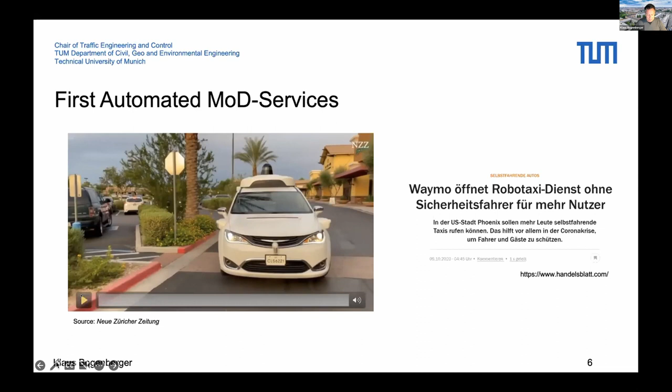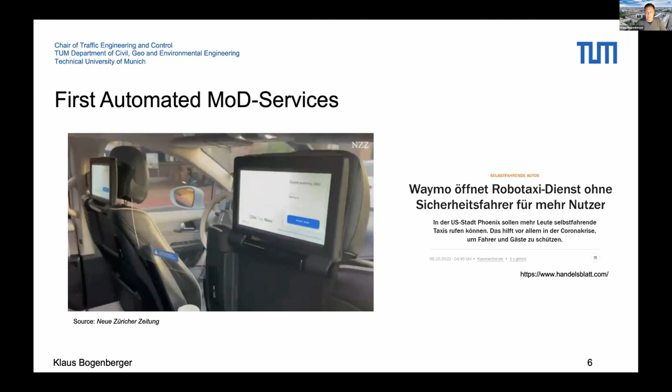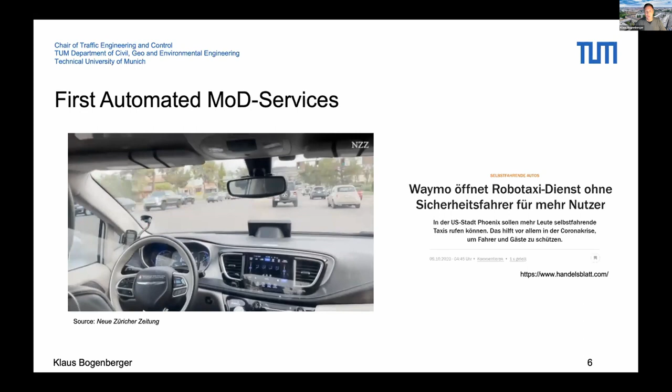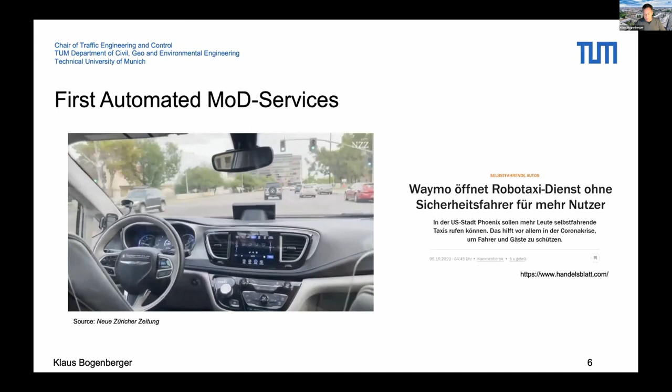So lots of people talk about automation. There are first automated vehicles available and first automated mobility on demand services - a very famous one in Phoenix, Arizona. Here's a little video - this is a so-called robo shuttle service, from a famous Swiss newspaper, and the journalist made a trip and tested the system. It worked very well. On YouTube you can find lots of videos with problems as well of such robo shuttles at the moment. But if people ask you when vehicles will drive automatically, you can tell them it already started - you can go on YouTube and find the first videos, and really see it. Actually, I've never tried it myself by now.

Also in Germany, we're going to see such a service soon. Sixt, a very famous car rental company, together with the company Mobileye from Israel, will launch a service in 2023. Of course, the fleet size will be very small, and we are very interested in seeing how it works and how people accept such a service. I have to say this will not be fully autonomous at the beginning, but the idea in a later stage of the project is also to be autonomous.

Also, Volkswagen, in brackets MOIA, are testing autonomous driving for their MOIA service. I just recently saw a vehicle like this in Munich driving around, so they are already testing their automated bus on real streets. We also expect in the near future that MOIA will test autonomous robo shuttles in their Hamburg service.

So now you know what I'm talking about. There are a couple of questions in the chat. Okay, that's not from here.

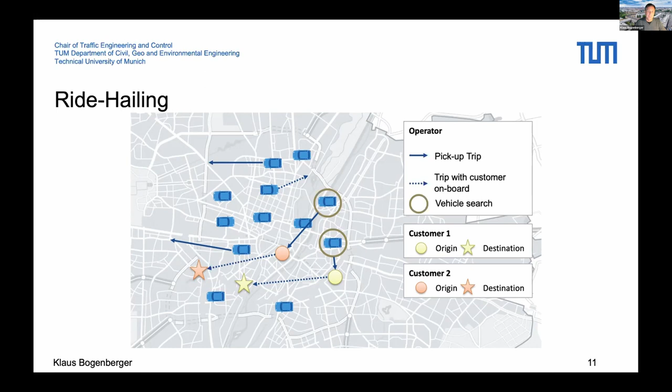In difference, ride pooling: same two customers, same origins, same destinations. In this case, the idea is to combine the two trips. So at first, there would be a vehicle driving to customer 1, then customer 2 is boarding, and then both are driven to their destinations.

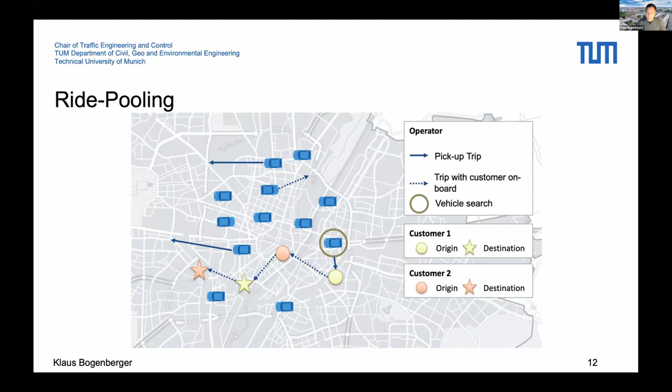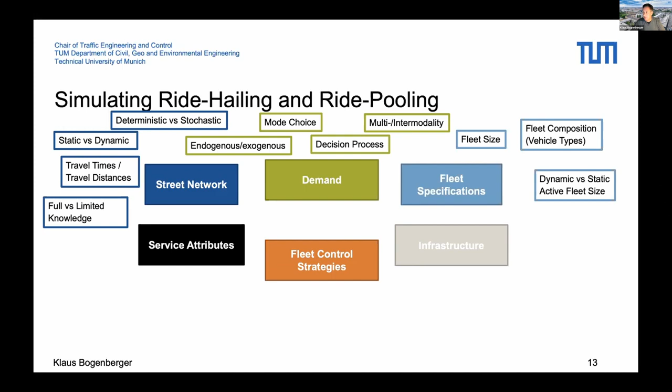Then you have to think about the fleet that you are looking at. What is the fleet size? What is the fleet composition - all electric, mixed engines? How many seats do you have, different number of seats? And are you having a dynamic or a static fleet? Is the fleet size always the same, or is it changing? And what's the number of active vehicles at the moment?

Then your service has a certain infrastructure. Are you having depots, or are you using on-street parking and on-street charging, for example? What is the boarding location you are using - are you using bus stops, or is it a door-to-door service? And what's the operating area?

Then there are several service attributes as well that you have to define. So you need to have a pricing strategy - the pricing strategy affects the mode choice, probably. If you have a high price, people are not willing to use your mode. What are walking distances and time constraints, for example detour times - people might only accept certain detour times as well. And then, of course, several fleet control strategies - routing plays a very, very important role, charging, rebalancing, and many things like this.

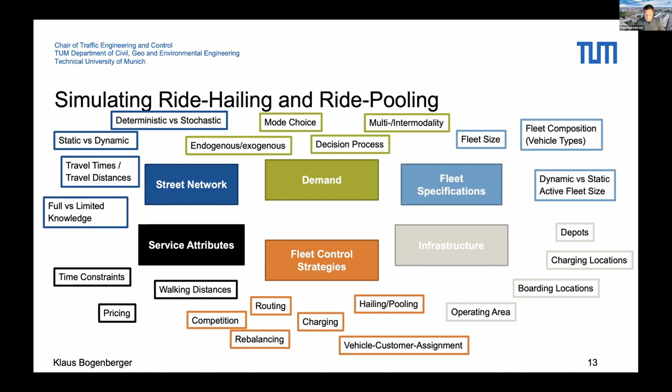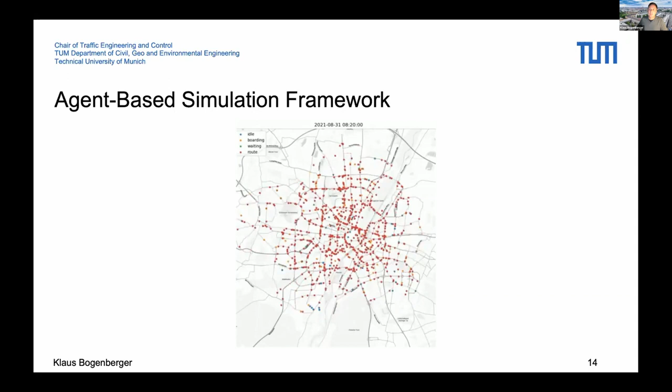We developed an agent-based simulation framework with which we are mainly working. Here's a little animation about that, and a short announcement or advertisement.

So we used this framework at the beginning to optimize hailing services. And the question was, how do you control such a hailing service? Remember, this is the situation where we just pick up one person and drive this person to his or her destination. The first question is, what customer vehicle assignment strategy are you using? Which vehicle are you really sending to the person?

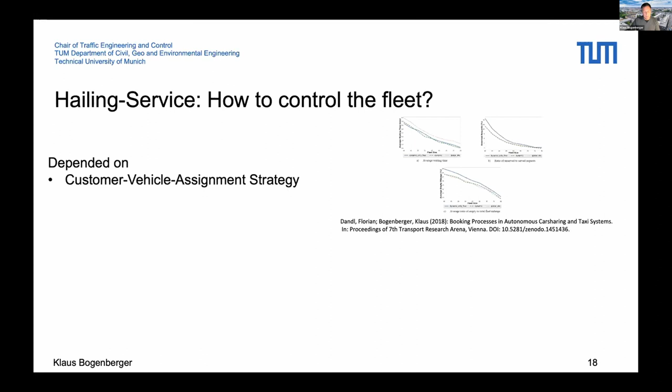Of course, there are several different options available. We tested several different algorithms, and all the different algorithms are available in the FleetPy environment.

The second question we tried to answer was, how dependent is your service on the quality of the demand forecast and the vehicle repositioning strategy? It's very important to estimate the correct demand, because the demand more or less also affects the repositioning strategy. Repositioning means that in advance, even without a request, you are already sending vehicles to certain locations in your network because you anticipate a future demand in this area. The more precise you have this demand, the better you can position the vehicles, the shorter the waiting times are for the customers, and the better the overall service.

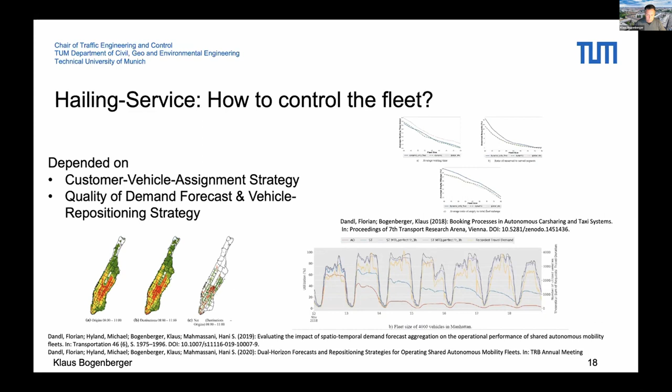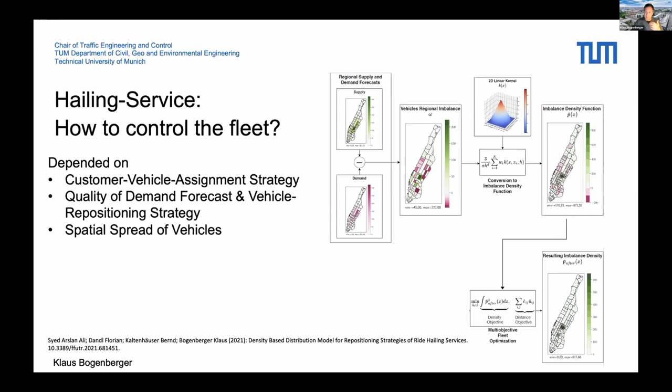Therefore, for the repositioning strategy, we developed a specific rebalancing or imbalance density function. The question is whether your system is imbalanced, which means you do not have enough vehicles in a certain area of the network where you expect high demand. This was already used in similar approaches in free-floating car-sharing systems. Here we advanced the method a little bit with a specific density estimation method to estimate the precise future demand and then forecast the imbalance. And if you have an imbalance, then you can proactively send vehicles to the areas with vehicle shortage.

Very interesting is a comparison of free-floating car sharing and autonomous hailing. We had a data set from DriveNow for Munich, and DriveNow was operating in Munich with approximately 600 car sharing vehicles. So we had this demand, the number of trips that were operated by this free-floating car sharing service provider. And then we tried to figure out how many vehicles you would need if this demand should be served by an autonomous hailing service.

You can see a function here. These are different strategies with different waiting times and detour times and things like this. And the dashed line here at 150 shows more or less the best value of the objective function. So the answer is you roughly need about 150 robo-hailing vehicles to serve the demand that was served by a free-floating car sharing service. This is 25% of the vehicles.

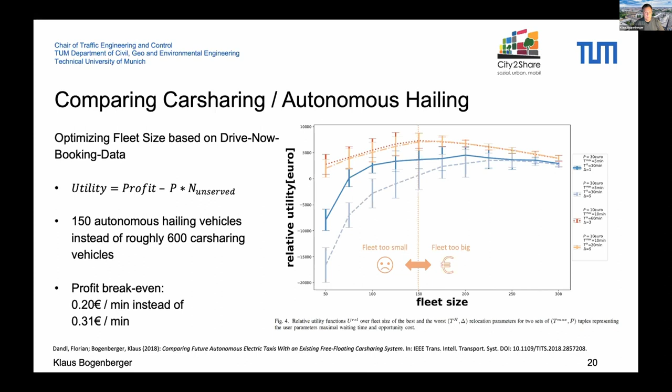Now to pooling. So this was hailing, now to pooling, and there's a very important factor in pooling called scaling. At the beginning, we developed an analytical model based on the so-called shareability. Analytical means, in this case, we didn't use at the beginning the simulation framework. We used a more or less geometric model, displayed here on the upper right. And based on this shareability, there's a shareability index with several parameters, system or service parameters and city parameters.

Therefore, you need the average velocity that can be driven in a city, so a very global value. You need to define the operating area. You need to have an idea about the pooling demand. You can derive that from the individual vehicle trips, for example. You need to think about the detour time, the maximum waiting time, and the boarding time in your service. These are all parameters you need.

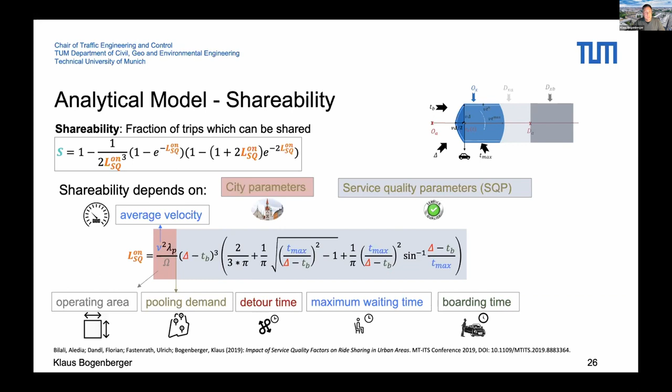So this model is very helpful when you think about implementing a ride pooling service in a city, because you don't need any simulation at first. These are very global parameters, usually very easy to get. And then you can try to figure out how the shareability in this city looks like.

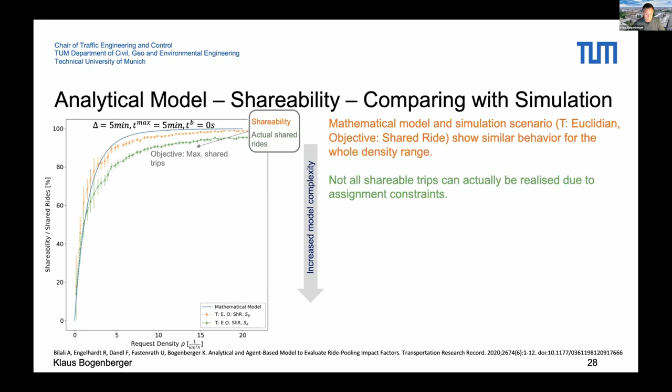Of course, not all shareable trips can actually be realized due to assignment constraints. So there are certain objectives that you need to consider. Then it further decreases - you have to be aware of that - by up to 50% when changing the optimization objective.

From just putting them all in the vehicle to save distances or minimizing vehicle kilometers traveled. So at the beginning, you just try to get them all into the vehicle. Now you try to minimize the driven distance of your vehicles, or you try to minimize the vehicle kilometers traveled.

Then when you change to a real street network, you also need to think about that this further decreased the shareability. And now we are in a realistic range, almost realistic, because when you apply temporal and spatial inhomogeneous travel times, which a real network has, then the shareable rides further decrease. So from the theoretically optimum at the beginning, you need to be aware that the real shareable rides decrease significantly. We tried to estimate percentages for this degrading.

It's possible, but I would say it depends. We didn't really do enough networks to have stable results of these parameters.

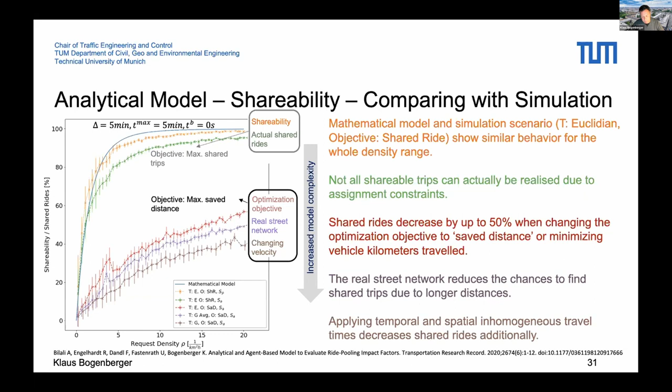When you simulate pooling services, so no analytical anymore, then you're gonna see what is really, really important when you implement a ride pooling service. On the x-axis, and this is a study for Munich, Germany, you see the simulated demand, so from 1 to 15% of the individual trips in Munich.

We have about 2 million individual trips a day in Munich. Therefore, you need a specific fleet size. So for the 1% demand, you need about 200 vehicles, while for the 15%, you need about 3,000 vehicles.

And when you then look at the relative save distance, you see that up to a degree of 5%, you're gonna have negative relative save distance, which means by implementing such a service, you induce further vehicle miles or vehicle kilometers. So the vehicles drive more than before because of empty trips to the customer, pickup trips, and the pooling effect is not that high.

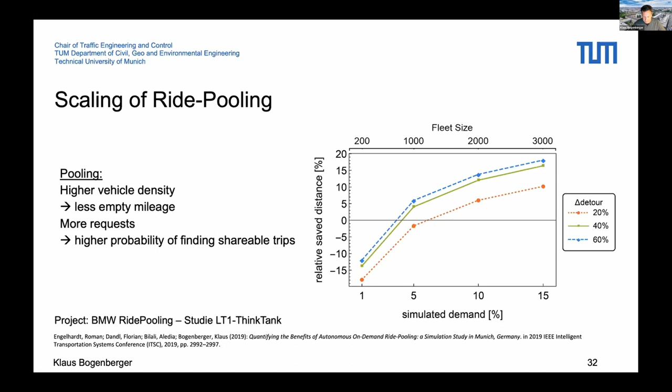This can also be illustrated in the 15% scenario, where you almost save 20% relative distance. You see in green a reduction of flow, more or less, on all major roads in Munich. You still see some red - these are minor roads where people need to be picked up.

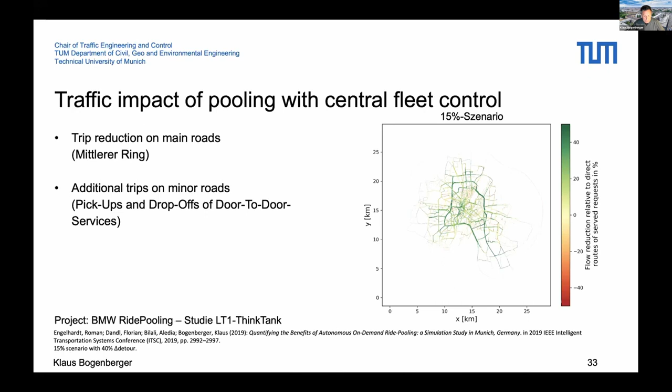But compare this to the case of the 1% scenario, where we have induced further vehicle miles. You're going to see red. So lots of roads in Munich would get more traffic, more or less, more vehicles.

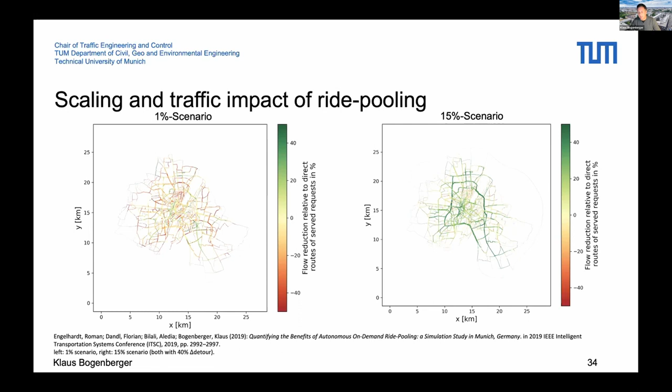So almost all requests that you get can be served in a reservation-based system. This is fairly easy, especially in this case, because this was a scenario with reservation only. But also relocation improves the situation drastically in comparison to the just basic on-demand service that I was talking about before. And another thing is that also in lower demand scenarios, you already get a mileage benefit.

You're already going to save distance. In the case of a reservation system, even with a very low demand with the 1% scenario, you end up at 0, so no more trips. And from this on, you're going to save lots of distance.

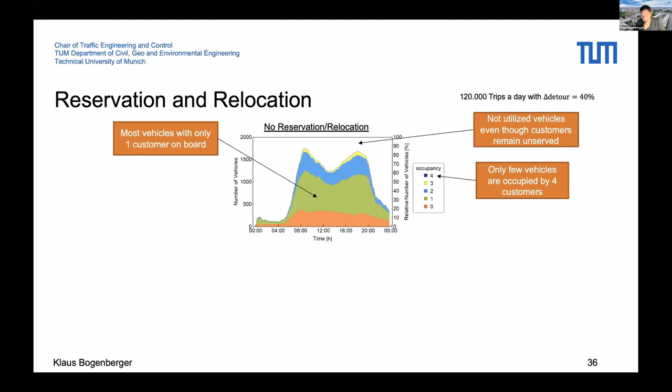But in this case, 4 was the maximum number of passengers. If you implement relocation, you add empty vehicle trips, because you try to anticipate the demand, and then you send vehicles to the areas of expected higher demand. And in this case, you're going to see the following.

During the peak, the fleet is almost fully utilized. You get much more people in the vehicles, especially the 2 and the 3 a little bit, and it drastically improves the situation in the reservation scenario, where you can now also clearly see that at the morning and evening peak, we see occupancies of up to 4 passengers.

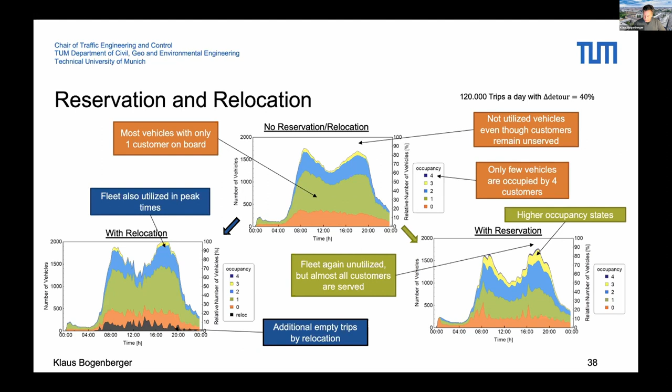I mentioned before that this was a fully reservation-based simulation scenario. For the upcoming TRB, we have a paper accepted where we did a simulation of a mixed operation. So here, some of the people are allowed to, or are reserving their trips, while others are fully on demand. The problem is that this creates a really large vehicle routing problem.

What we do, more or less, is solve the problem for the pre-booked reserved trips, and implement that later in the on-demand cases, or in the on-demand time horizons, and integrate this solution. The suggested algorithm that we developed works fairly well, and we got pretty good results.

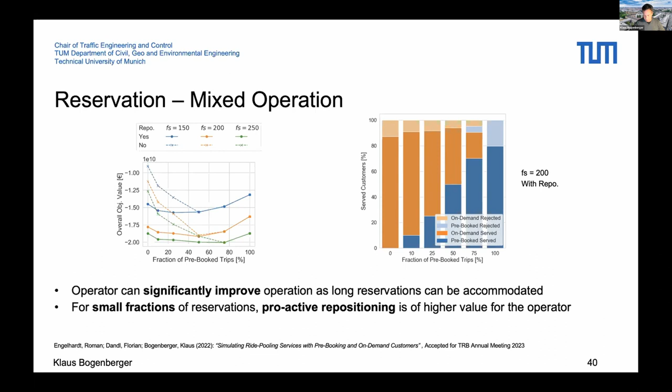Otherwise, the service quality is really bad, because a customer is pre-booking since he wants to be sure he can make his trip. I think I'm jumping a little bit now to a further slide here. We have been calibrating the simulation with real data.

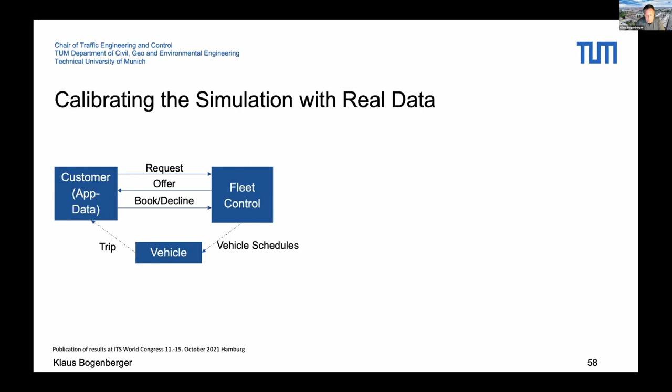As I said before, we were very happy because together with our colleagues from the Karlsruhe Institute of Technology, we were the scientific partners at the beginning of the MOIA service, and we got lots of data from them, from app requests and so on. We did a big survey to estimate the demand, especially the colleagues from KIT did that. And we could compare our simulation results with the real service. There were about 400 vehicles operated at that time in Hamburg.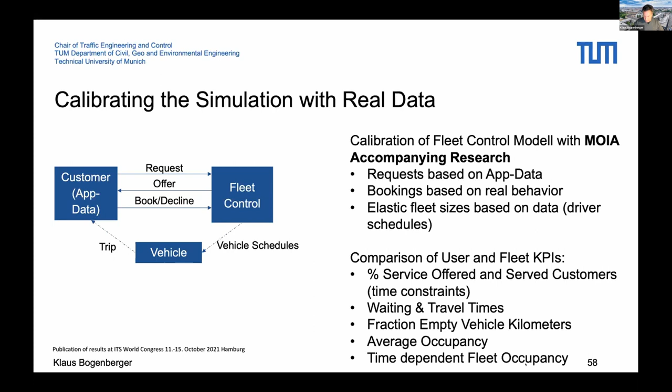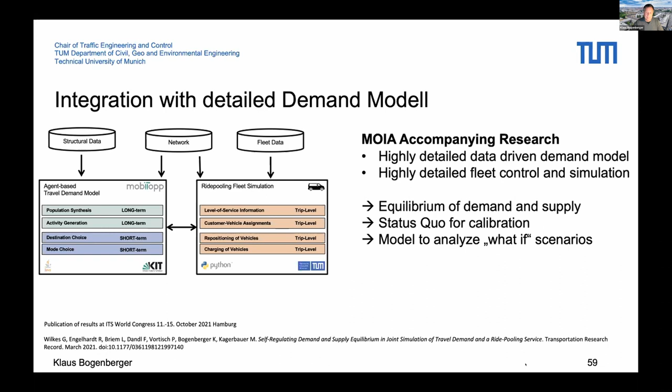What was also possible in this project is that we could combine their agent-based travel demand model with our ride-pooling fleet simulation model. As I said before, mainly for calibration purposes, this was really, really interesting, and there's a very nice visualization of this Hamburg network.

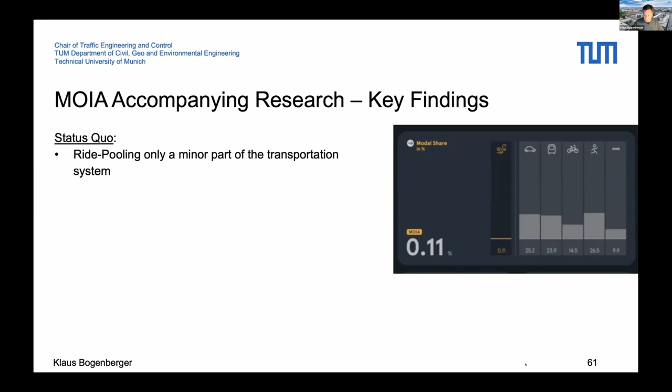Some key findings of the ride-pooling bus service: ride-pooling plays only a minor part in the overall transportation system in Hamburg at the moment. As you can see, only a very small modal share compared to all the other modes implemented there.

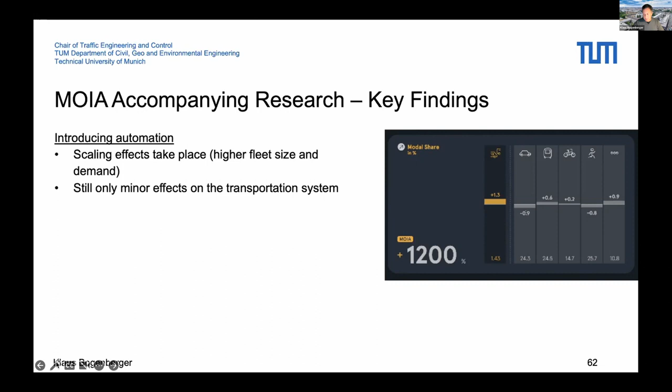If we would implement automation, then this would significantly increase, up to 1,200%. So we would end up at a mode share of around 1.3% of overall trips. Mainly this can be seen from vehicle trips, but unfortunately also a little bit from walking.

And if we would additionally implement regulatory measures, fees and things like this, the mode share could be further increased in Hamburg, almost up to 3%.

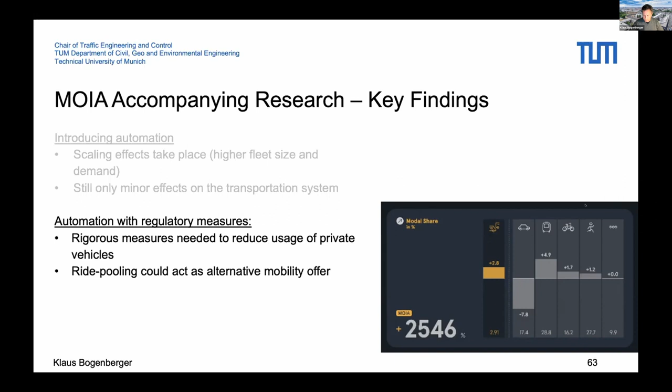One final research part I want to explain: now that we know scaling is very important, with big fleet size and lots of customers, everybody would say this is a monopoly. But a monopoly is not good, because then the price can get really difficult, or the pricing strategy, as we see in the energy market at the moment. The same scenario could happen if you only have one ride-pooling operator. So what if you have two? Are there ideas to combine two operators?

We developed the idea of a so-called broker system. This is a central entity, which the city, for example, could play. This central entity collects the trip requests and gives them to, in this case, two operators, who can then make their offers. There are different options, and the user can select if he accepts the offer of the operator.

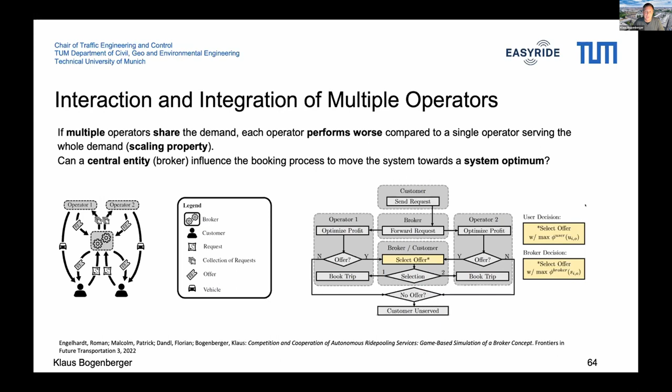If you do this in a smart way, then even with two operators you can be very beneficial, almost as beneficial as the single-operator case shown here on the right. Of course both would not have the same benefit as if they were alone, when it comes to relative saved distance in this case. But you could still be very beneficial. Both would be inducing no further vehicle trips, and this is good information, because it means we could allow two operators, but they have to collaborate, in this case over a broker system.

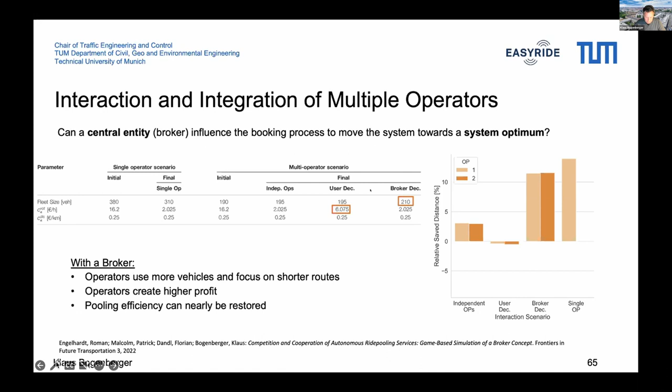Future research: I think there are many operational aspects we can still think about. We need to calibrate the models better. We do not have enough data by now for ride pooling services, or even for automated ride pooling services, so whoever has data, we would be happy to get it, or if you can share it.

I personally think traffic state estimation and traffic state forecasts are going to be very important in the near future, because the traffic state determines a lot. There are many routing algorithms, and a lot of routing in such pooling services. If we do not know exactly what the situation in the network is, and if we do not have a clear forecast for the travel times, the service will have no good quality. And if a service has no good quality, it's not accepted by the customer at the end.

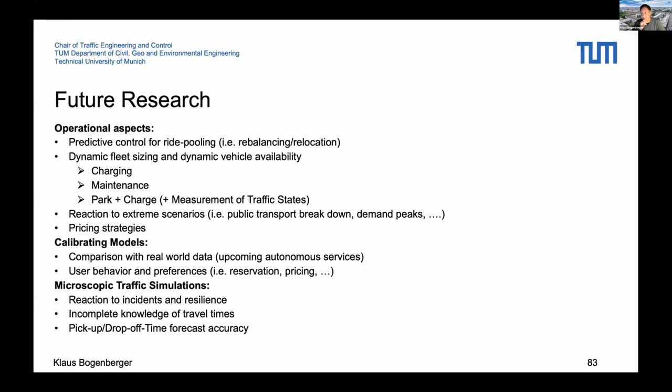So thanks for listening. One more time, the slide of our agent-based simulation framework, and I'm happy to take your questions.

Thank you very much, Klaus, for the great talk and the great overview. We have a couple of minutes for questions. There was a question posted on the document. I think Florian or some of your colleagues answered, but let me repeat it for the audience: is FleetPy, or in general the tools you presented, considering interactions between mobility providers, or are you planning more research on that? I think this connects to the last part of the talk where you discussed the broker system, which is pretty interesting.

Yes, the broker system itself is the idea of how you could manage such a collaboration, and you could use FleetPy to simulate things like that. I hope I gave the same answer as Florian did in the document. Yes, there is consistency there.

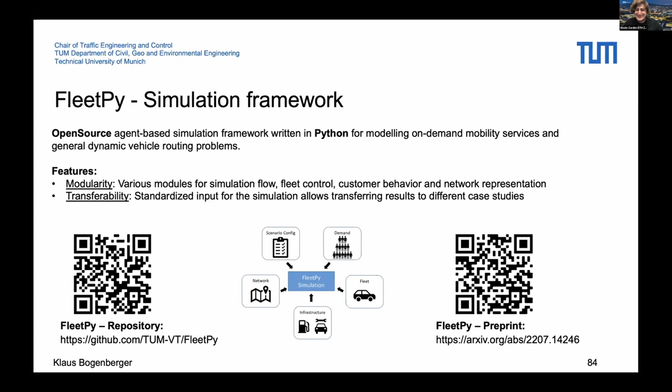Okay, then I have another question, which I haven't seen in the presentation, but maybe you thought of it. Are you thinking about using this simulator to consider future scenarios where you optimize the design of new infrastructure? Like now the setting is: I have a network, I have a demand, I study some algorithms, but what if one of the varying variables is the network itself? Can this be done?

I couldn't present everything, but we used it a little bit. We tried also to optimize stops, so the question is whether you're doing a door-to-door service or using a bus stop-based system. It's much better to implement stops - that's, by the way, also what Moia did in Hamburg - because you can save lots of mileage when you have implemented stops. So this is a first network question.

But of course we are thinking about network design also in comparison with other modes, especially biking, which plays a very important role in European cities at the moment, but we haven't done that yet. There are projects and ideas out there where we think about how a city could look with only an on-demand robo-shuttle service and biking.